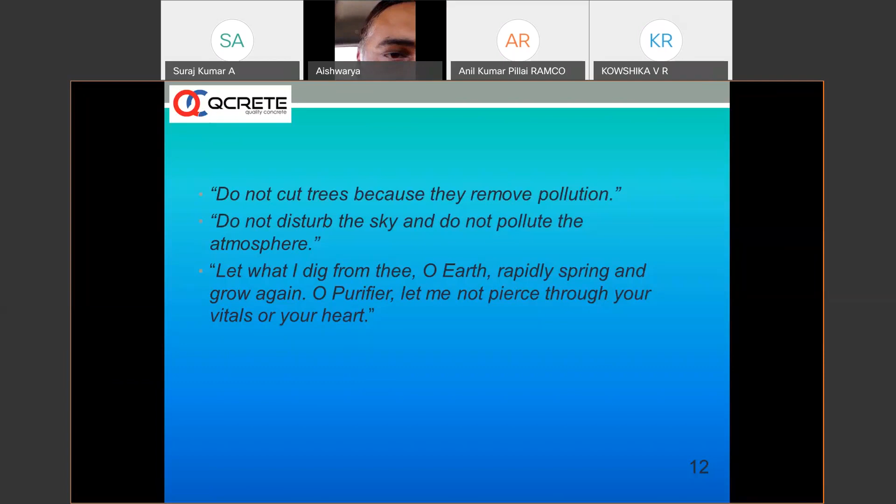Sustainable development is two things we need to understand. One is meeting essential needs of the world's inhabitants, recognizing the limitations of technology and society's ability to meet present and future needs.

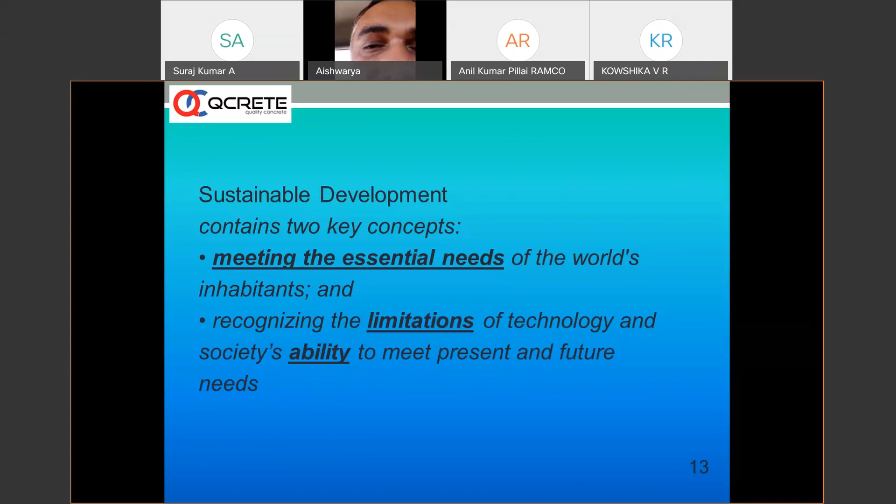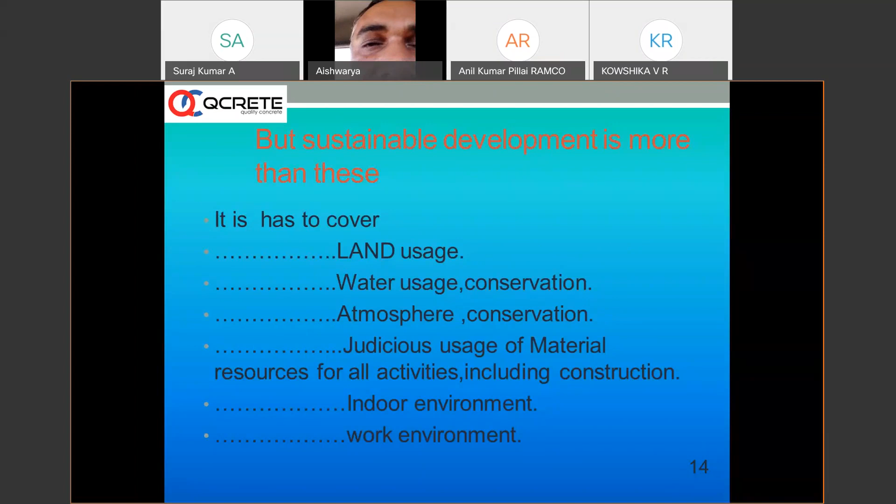Sustainable development is more than land usage, water usage, atmospheric conservation, judicious usage of material. That is where we are going to talk about SCMs. Indoor environment, work environment, all these things we need to take care of when talking about sustainability.

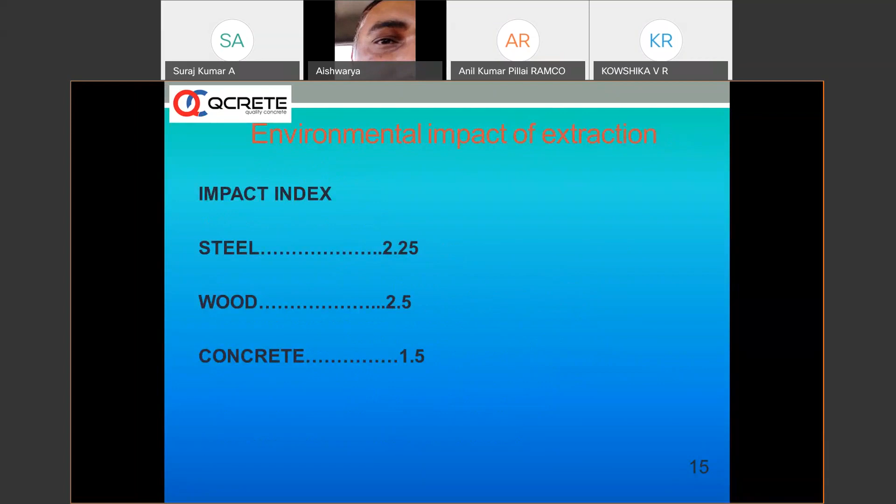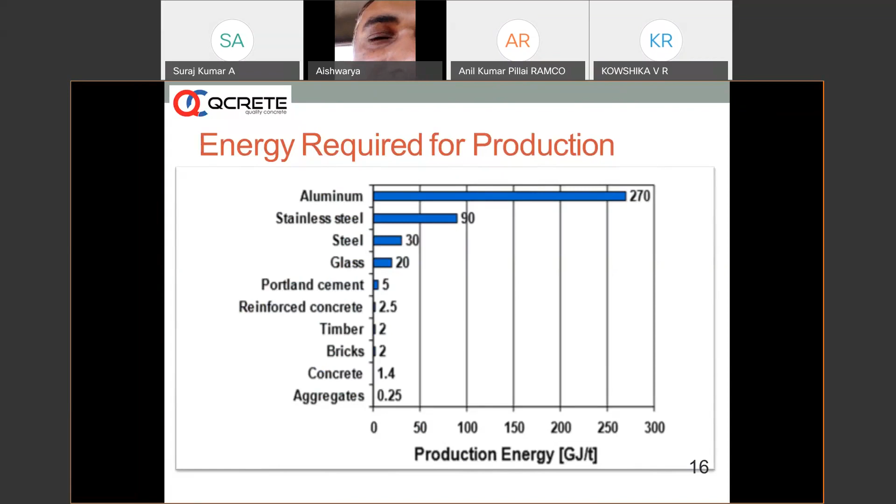Talking about concrete, you can see that concrete is a material which has the least impact on the environment. This graph shows that production of concrete has the least energy consumption when compared to other materials.

Having said all this, we also need to know that human beings involved in construction, cement, and concrete production are giving a big amount of carbon dioxide emissions and greenhouse gas emissions. Even though we are trying to limit these, we are having a great impact on the total environmental impact.

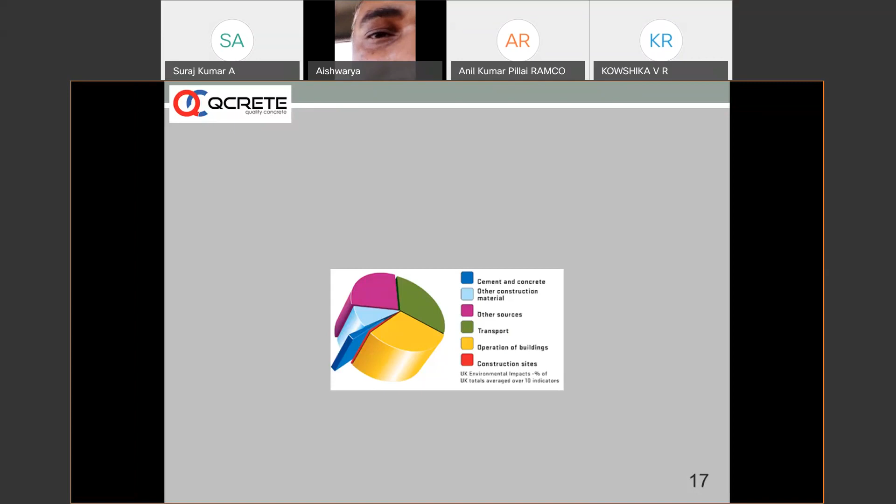So what are the problems we face because of which we are going to talk about SCMs? They are cement manufacturing, material acquisitions, and use of water.

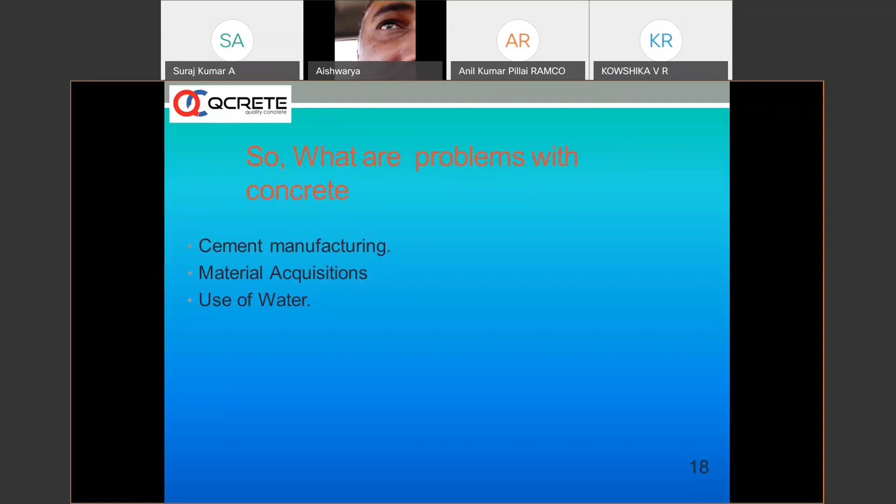Cement manufacturing - all of us know that every ton of OPC produced will give about 800 to 900 kgs of carbon dioxide. We all know carbon dioxide is one of the gases referred to as a greenhouse gas, which is causing global warming.

And 5% of carbon dioxide emissions are coming from cement production, which is alarming. That is why we are talking about today's topic of SCMs, how they are used in the ready-mix industry, and what is the contribution of the ready-mix industry towards the usage of SCM and containment of carbon dioxide emissions.

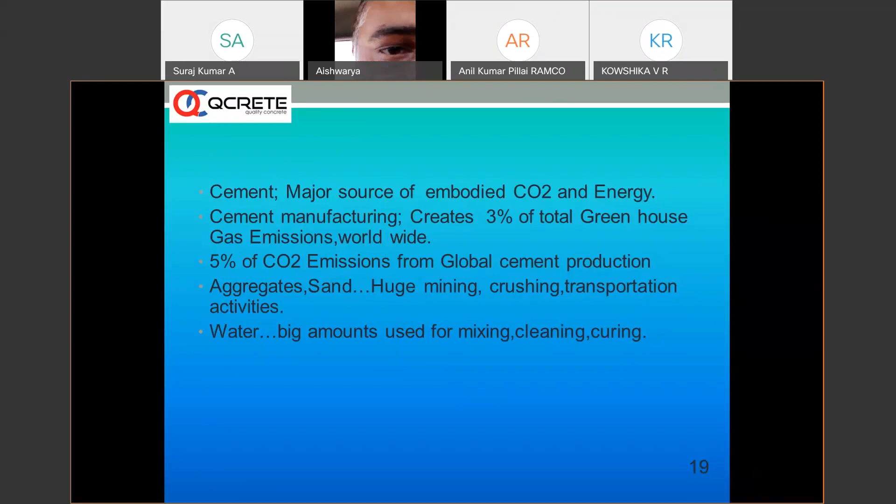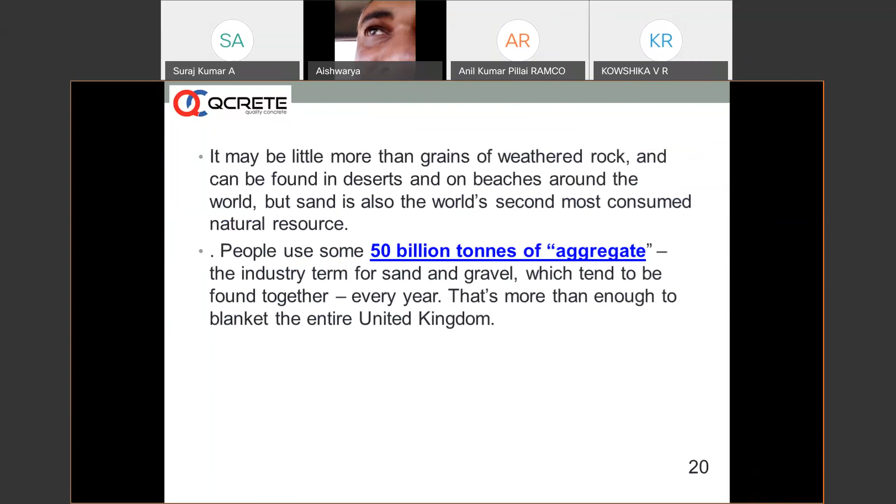The construction industry uses a lot of aggregates, and it's said that about 50 billion tons of aggregates are taken out every year. This is enough to blanket the entire United Kingdom. The construction industry not only uses aggregates and sand for concrete production, but sand is also used for production of glass, which is also a largely used material.

So to become environmentally responsible, concrete production systems need to prioritize minimizing emissions and waste, improving energy efficiency, and ensuring excellent product quality.

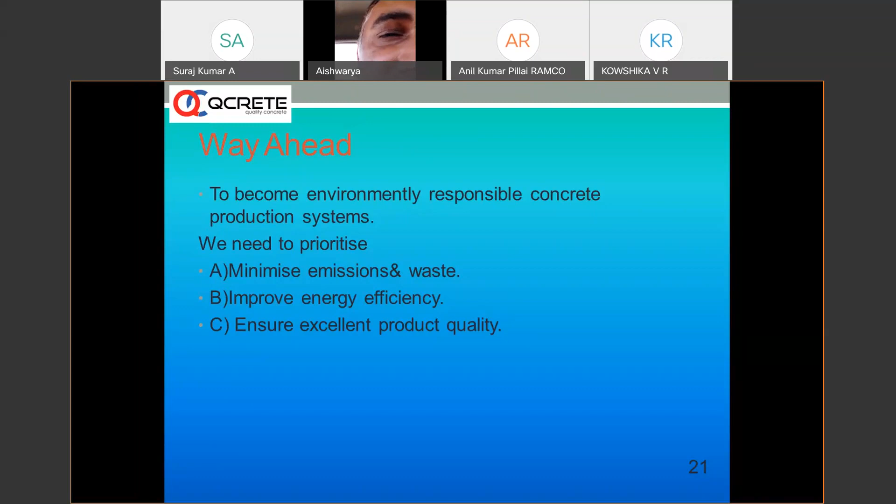So how do we do it? We need to reduce concrete usage by reduction of thickness of members. For that, we have to use HSC, HPC, use lesser binder material, especially OPC, and use supplementary cementitious materials.

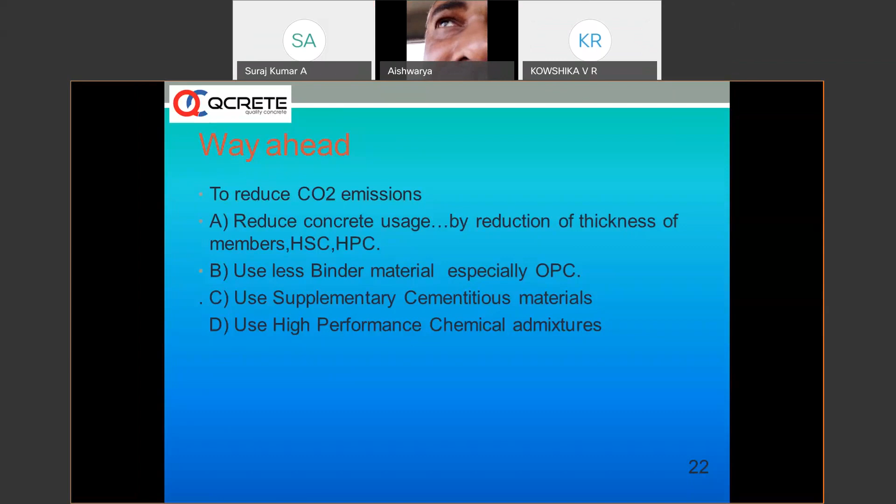That is today's topic - why we have to use SCMs, and what is the contribution of the ready-mix industry, how it is used in the ready-mix industry. That's what we are going to talk about, and also use high performance chemical admixtures. That is how we are going to make a lesser impact and make this planet better.

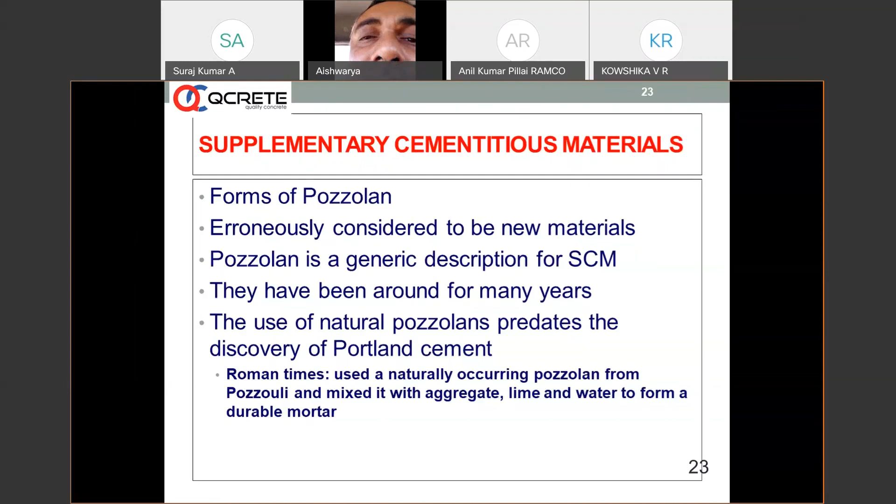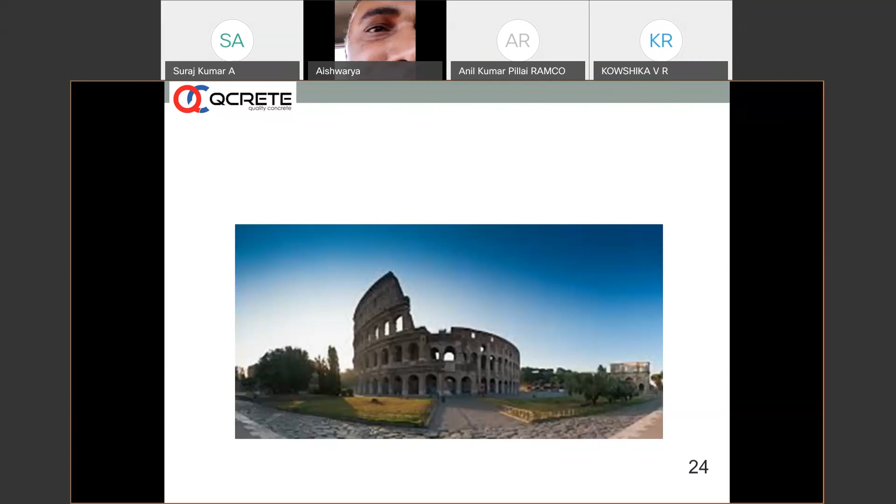Pozzolans are basically rich in silica and alumina. If you look at the composition, they are Al2O3 plus SiO2 plus Fe2O3 plus CaO in various percentages. If you look at different pozzolanic materials, these percentages will vary, and of course the same materials you can see also in cement.

The difference is that these materials will work only in the presence of cement and water - they cannot work on their own. The hydration reaction produces lime, and hence Portland cement works well with pozzolans. The degree of reactivity of various pozzolans with lime is called pozzolanicity.

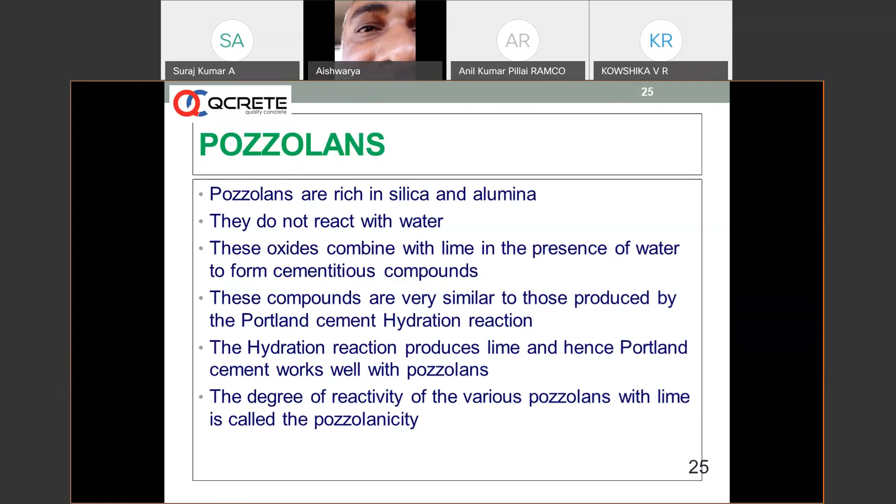We have the most famous modern pozzolanic materials: fly ash and GGBS, as everybody knows, as civil engineers and people associated with the concrete industry. We all know that fly ash comes from thermal power plants. It is absolute waste for them.

Long back in 1999, when I visited the Ennore thermal power plant, I was shocked to see tons and tons of fly ash being pushed literally through pipes into the sea. I don't know what is happening presently, but at that point of time, you could see this fly ash floating around near the thermal power plants, where there are mountains of this material.

At the thermal power plant, it is stored in big stockpiles. Basically it is a waste material for the thermal power plant, and it does not serve any purpose for the plant itself. So usage of this waste material in the concrete industry has a lot of benefits, which we are going to talk about.

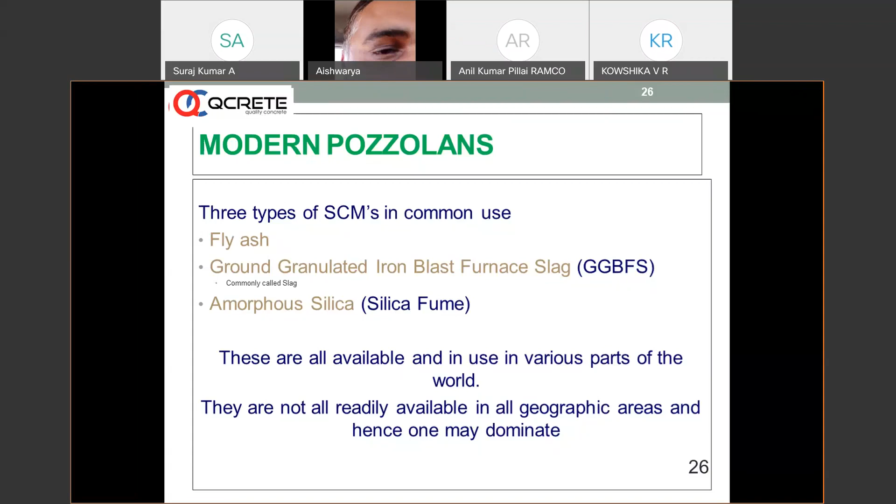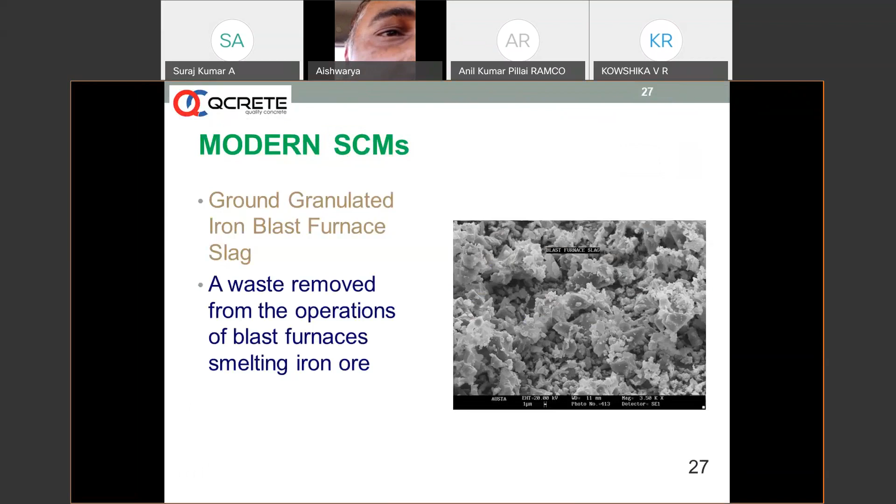Now, coming back to the waste that we have around, you can see one of the microscopic structures of GGBFS in this slide, as observed under an electron microscope. You can see flaky particles.

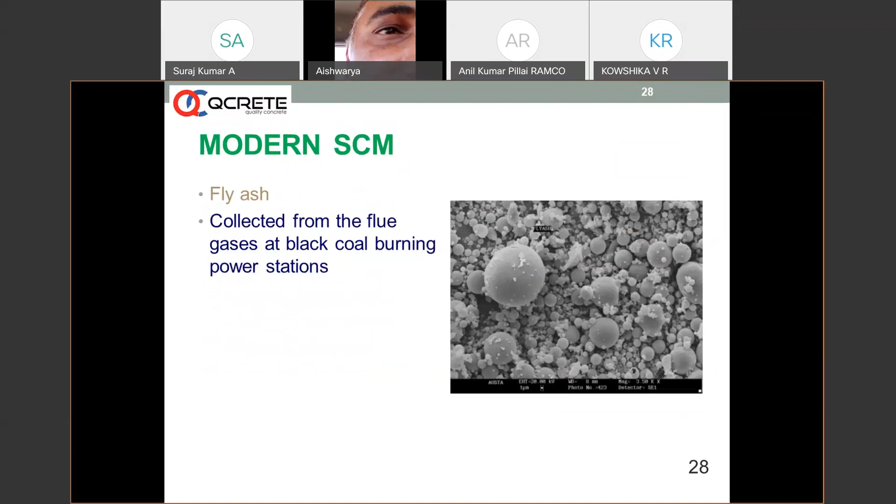This man, Bryant Mather, in 1982 said that we should be moving from a position of why we should use fly ash to a position of why we should not use fly ash. We should be giving reasons why we should not use it, rather than reasons why we should use it. There is so much literature available, so many trials and experiments done, so much R&D work done throughout the world, that Bryant Mather said OPC will be seen only in the museum after some time, and only blended cements and blended materials will be seen throughout the world. That is what he said in 1982.

We have moved a long distance from that point of time, positively, in a very big way throughout the world. Even in India, we have made tremendous progress, and the contribution of ready-mix companies is significant in this matter.

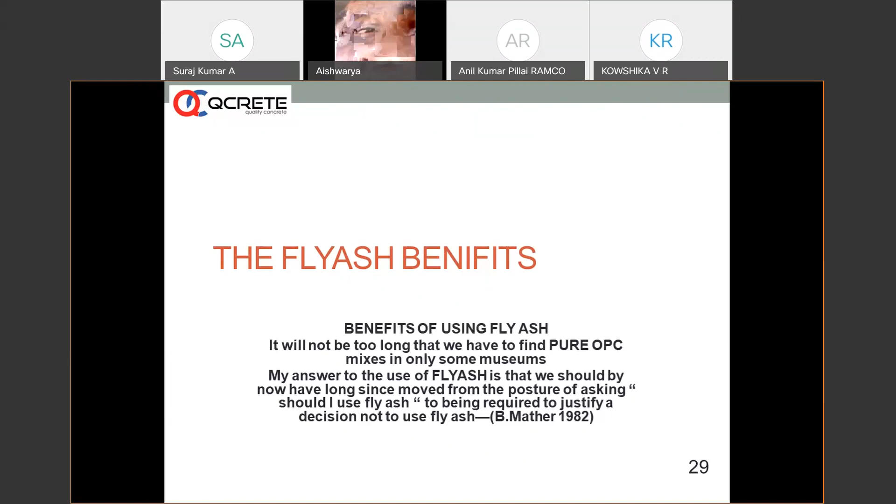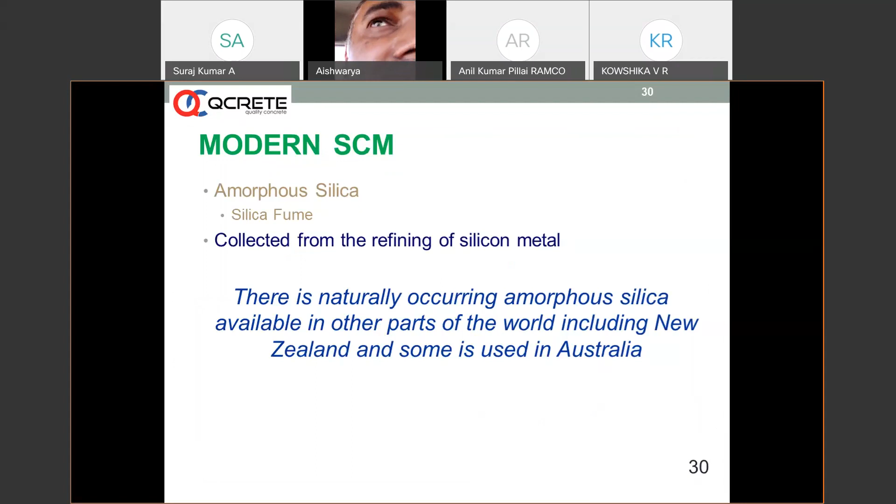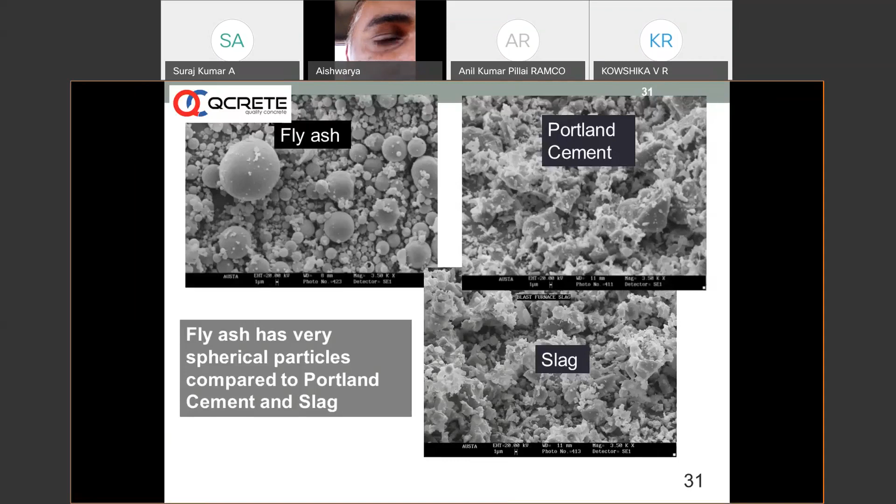The reasons why ready-mix companies and the concrete industry have to use SCMs are basically categorized into three categories: environmental, commercial, and technical. As far as I am concerned, the most important aspect of why we should use SCMs is the concerns related to environment.

That is why we have to use SCMs more, and the other aspects follow. Technical aspect takes the second seat—actually technical aspects are very, very important, how the SCMs benefit the concrete and durability of concrete. And of course, the commercial reasons, according to me, take the last place.

In fact, commercial reasons should not be considered, because the durability imparted by these materials is significant and incomparable to what happens when we use only OPC.

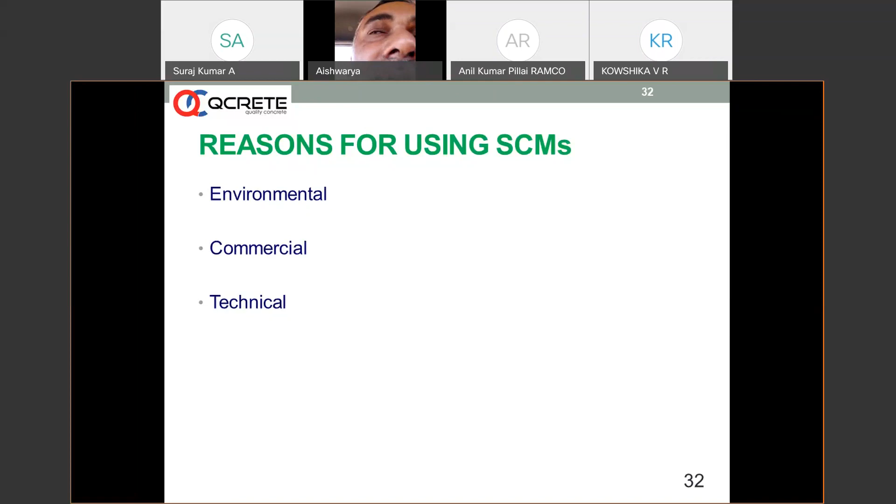Environmental reasons: fly ash is dumped into natural or man-made lakes or dams, and slag accumulates in large stockpiles. In the cement manufacturing industry, there is pressure commercially and environmentally to reduce energy use and emissions. The use of SCMs to replace a percentage of Portland cement reduces power demand and the generation of gases such as carbon dioxide.

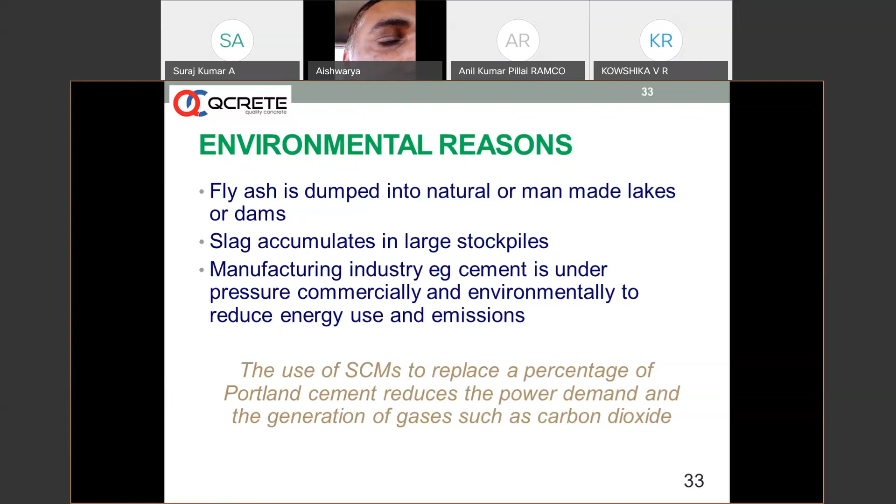Commercial reasons: lower material costs for concrete, as fly ash and slag are generally lower in cost than Portland cement. As I said earlier, commercial reasons should not be considered at this point of time, because there are many other reasons why we should use these materials.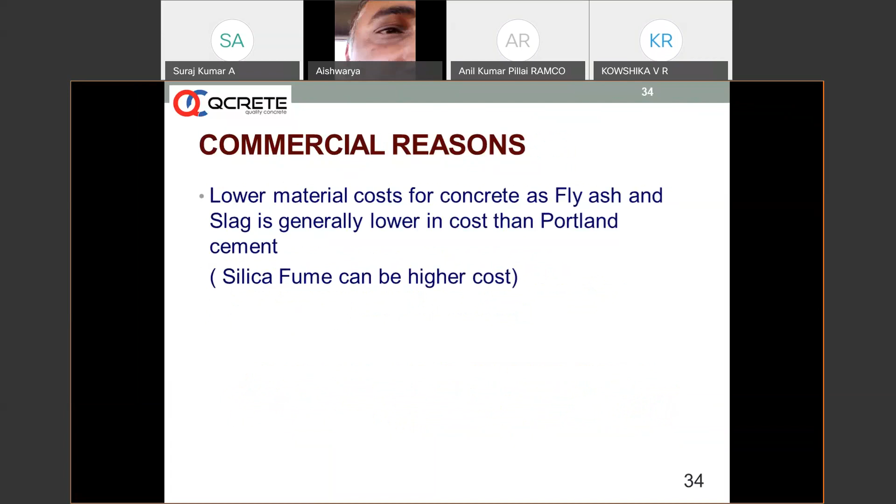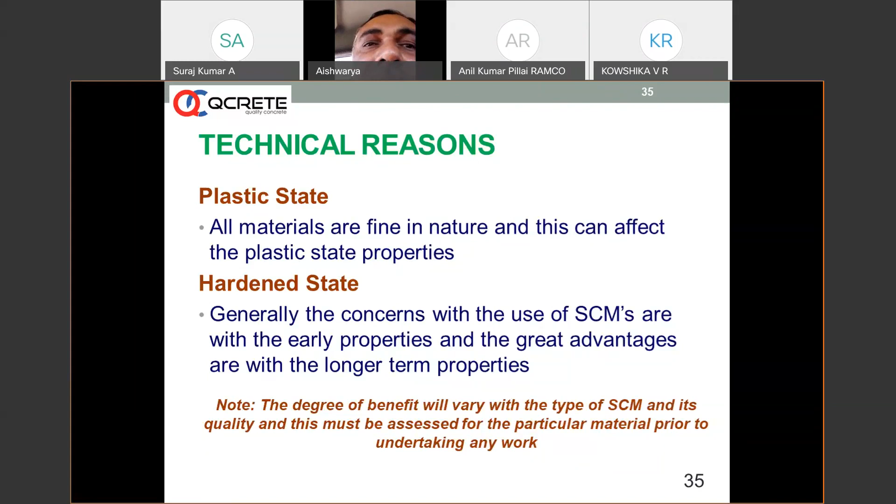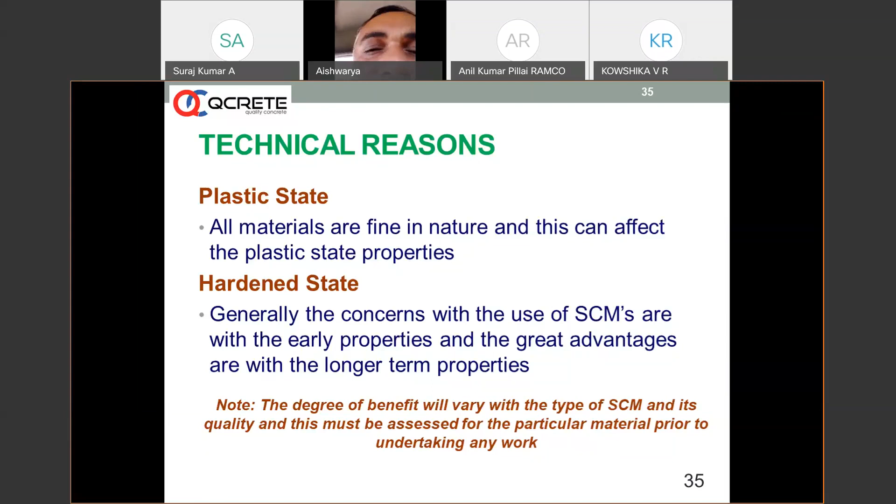Technical reasons are that all materials are fine in nature, and this can affect the plastic state properties. In the hardened state, the concerns with usage of SCMs are with early properties, while the great advantages are with longer term properties. The early age properties were earlier misunderstood - there was a misconception about the strength being lesser in the early state and early life of concrete, up to 7 days. But as concrete ages, other properties significantly transform it to the next level of durability, and hence that becomes a very important reason.

Portland cement controls the setting time of concrete, and SCMs reduce the quantity of Portland cement in concrete. Lower Portland cement content gives extended setting times. This helps a ready mix company to transport concrete - if a control concrete without SCM has a setting time of about 4.5 to 5 hours, the setting time with fly ash or GGBS is extended by about 1.5 to 2 hours, giving flexibility for transport over longer distances.

Bleed rate is also reduced, which is one of the significant contributions. If you look at an OPC plus fly ash mix, bleed rates are lesser. The mixes are cohesive, which is a very important advantageous property when using OPC plus fly ash.

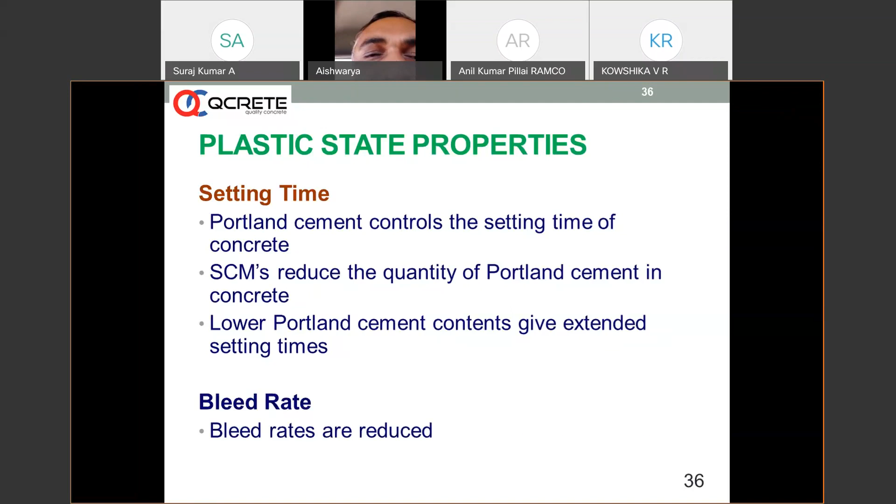Workability: SCMs are very fine materials. Fly ash has a major beneficial impact on workability. We saw earlier a slide showing the microscopic structure of fly ash - due to the sphericity of the particles, they move one over another, giving way for higher workability.

On the other hand, you can reduce water to some extent. Let's say we move from an OPC mix to an OPC PFA mix - taking a 300 kg OPC mix and comparing with 25% replacement of fly ash, that's about 225 kg OPC and 75 kg fly ash. When replacing about 25% from the control mix, there is a possibility of a minimum 6 to 8%, sometimes even 9-10% water reduction, achieved due to the sphericity, particle shape and size. So water-cement ratio is pushed down when using a fly ash mix.

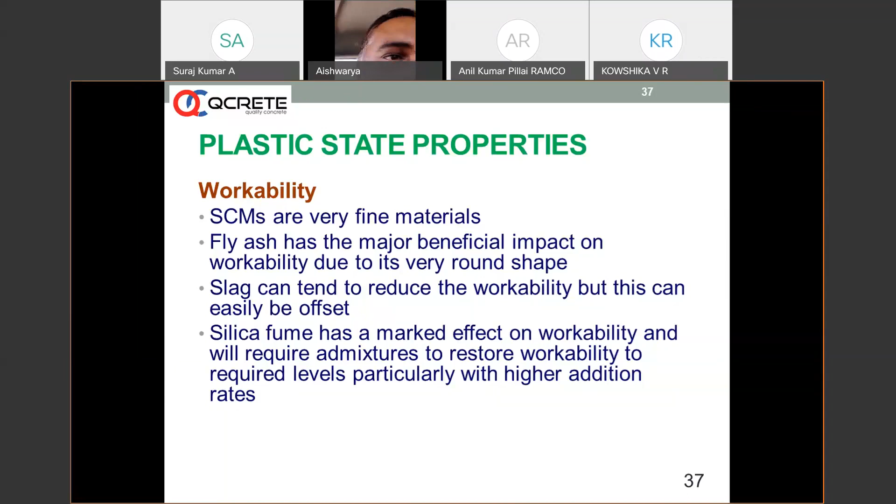Silica fume has a marked effect on workability and will require more admixtures. Sometimes silica fume is referred to as a slump killer - you have to use more admixture when using silica fume, otherwise you'll end up with slightly bigger water-cement ratios.

The improvement in pumpability and finishability is significant when using an OPC fly ash mix. OPC PFA mix makes the concrete smooth, cohesive, and reduces the pressure on the pipeline during pumping, and wear and tear of pipeline and other equipment are reduced to a significant extent. Anybody who has used OPC PFA mix likes it simply because of these kinds of attributes.

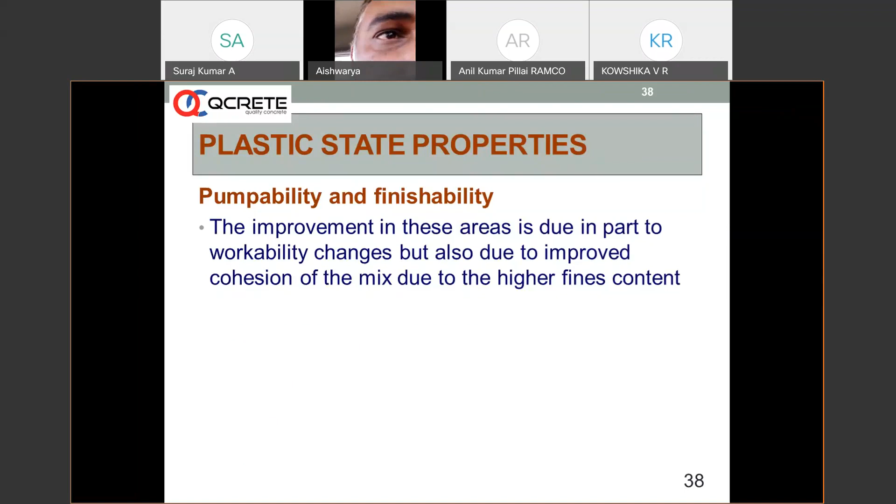One of the mixes we did long back in 2002, where the customer asked us to pump M10 concrete. He had to finish the PCC quicker in a day, 150 cubic meters. We used fly ash here as a pumping aid. Fly ash can be used as a pumping aid for long horizontal pumping as well as higher vertical pumping. So 130 kg of OPC was mixed with about 155 kg of fly ash, and we got about 10.5 to 12 MPa in 7 days. The requirement was only 10 MPa, so we had better strength, but the point was not strength - pumpability was significantly increased using fly ash.

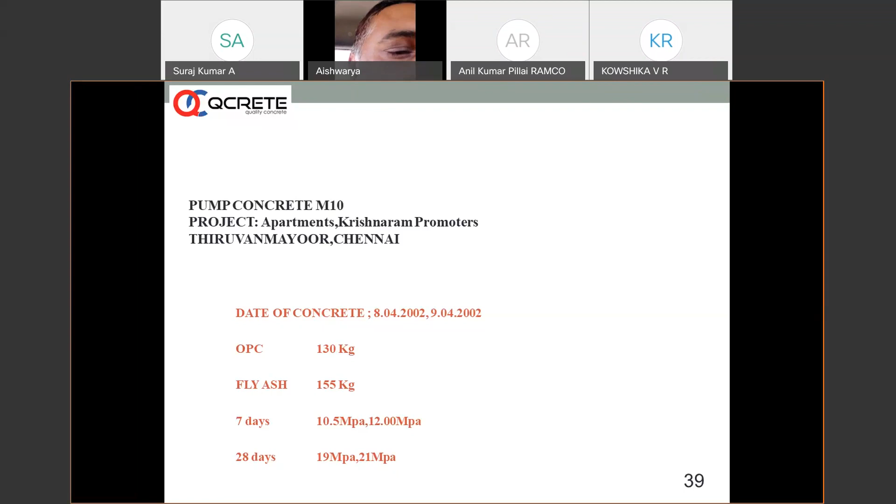The same pumpability characteristics were used in Burj Dubai, where most of the high-rise pumping in Dubai used OPC plus PFA plus microsilica for M100 concrete.

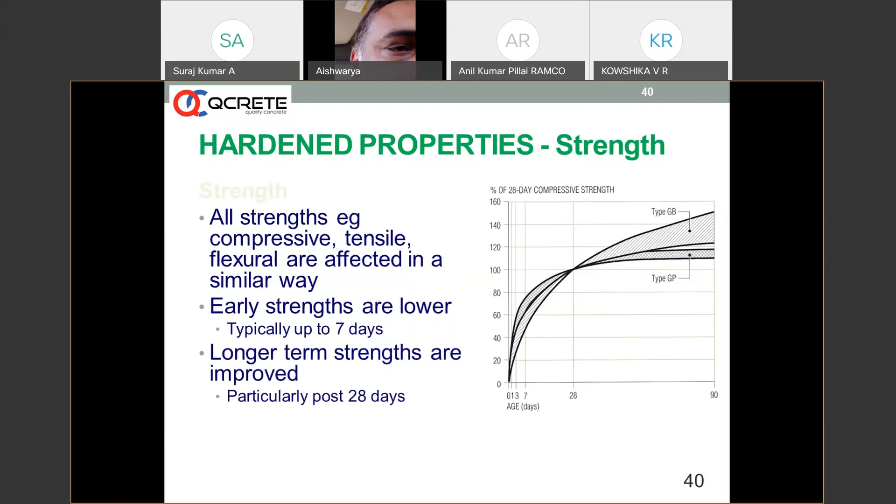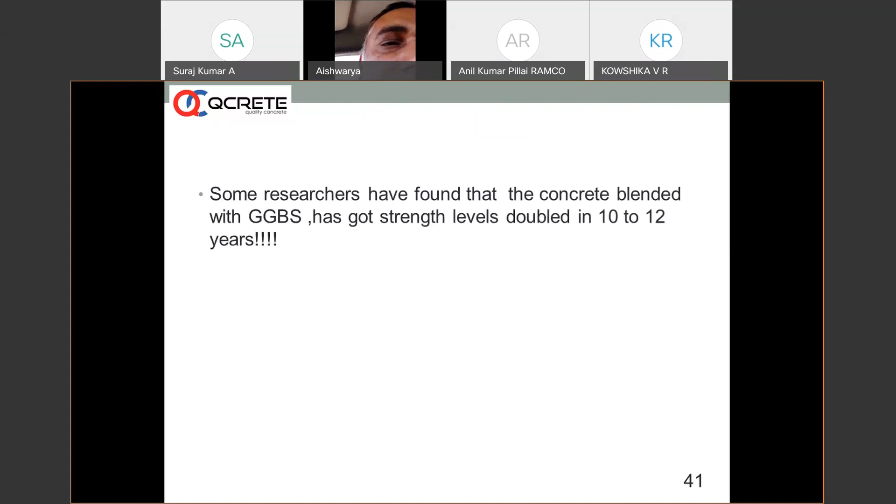Some researchers have found that with GGBS mixes, in 10 to 12 years the concrete almost doubles in strength.

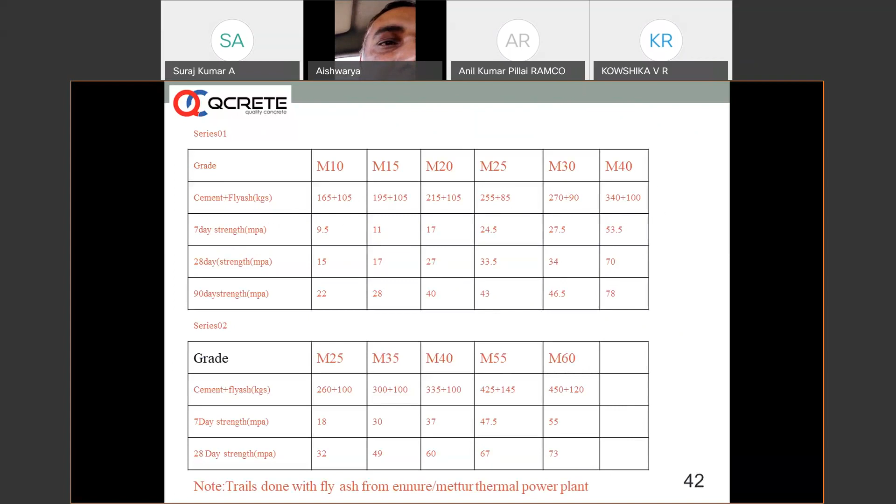The customer had purchased M25 and M20 concrete at that time, but actually got almost M40 or M45 grade concrete. So the customer gains this benefit over a period of time.

There is a reaction with pozzolanic material, always referred to as a secondary reaction. Cement plus water gives calcium silicate gel and calcium hydroxide. This calcium hydroxide is consumed by the constituents of mineral admixtures - SiO2, Al2O3, Fe2O3, CaO - and further calcium silicate hydrate gel is formed. The amount of calcium hydroxide in the concrete is reduced, and that is how durability shifts to the next level, making the concrete more durable with significantly improved long-term strength.

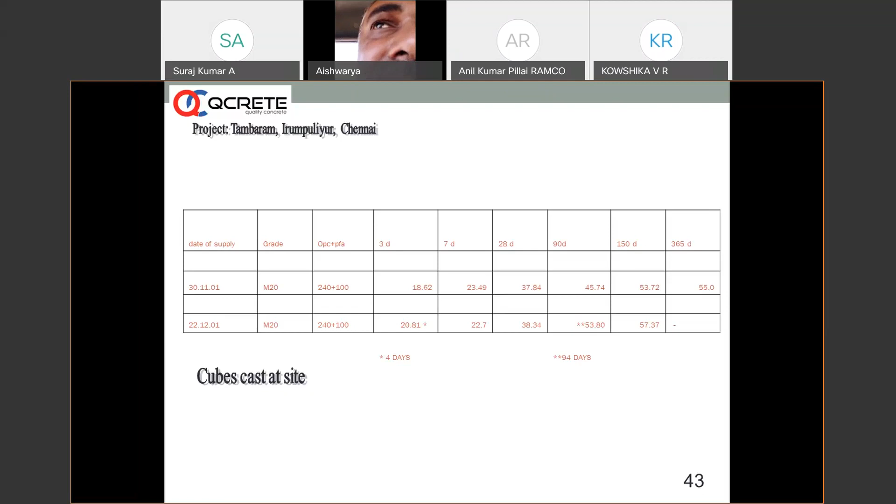This reinforces the thought that a customer who achieves, say, 30 MPa concrete in 28 days is bound to get almost 40, 42, or 43 MPa in 90 days. There is significant growth afterwards. Of course, the growth of strength over time depends on the fineness of cement and the properties of the fly ash in question.

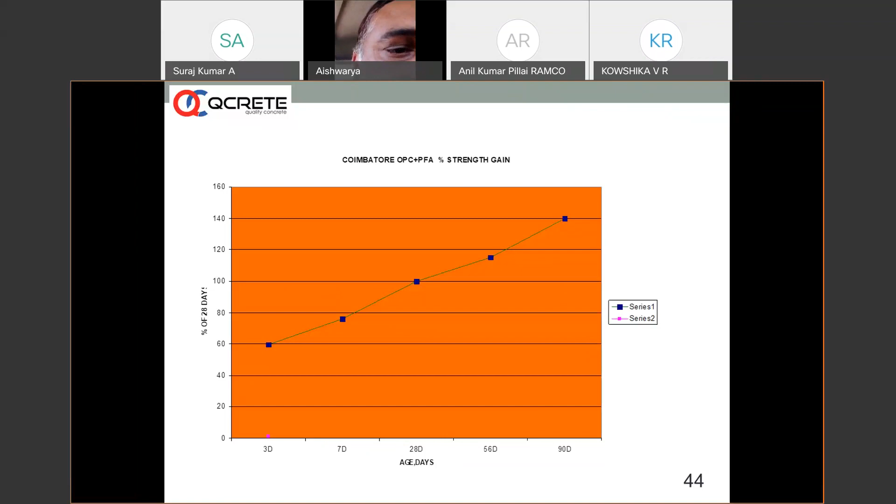Earlier, there were a lot of misconceptions. One of the misconceptions was that fly ash, when used in a ready-mix concrete industry or in a company, the point is that they were talking about lower strengths in the initial stages, and they were also talking about that high-grade concretes cannot be done.

So these trials, and there was a commercial production of this kind of mix actually in Hyderabad. We supplied about 120 cubic meters of this kind of concrete. So OPC plus PFA, in the year we supplied, about 2009. OPC plus PFA can be used to make M60 concrete and higher. And of course, without the usage of any other additional materials like microsilica, we could achieve 77 MPa in 28 days. So you can easily achieve 60 MPa and all.

We can use this kind of materials, SCMs, and make it. Only problem with this kind of commercial production is we should be careful about the consistency in the supplies. If there is a problem with the properties of fly ash, then it becomes a question mark, especially when we are using for high grades. Other than that, we can easily use and make concrete with most of the Indian fly ashes up to M25, M30, M40 easily. But when we are going for higher grades, we need to be careful, and we probably have to take the aid of other supplementary cementitious materials like microsilica, metakaolin, etc.

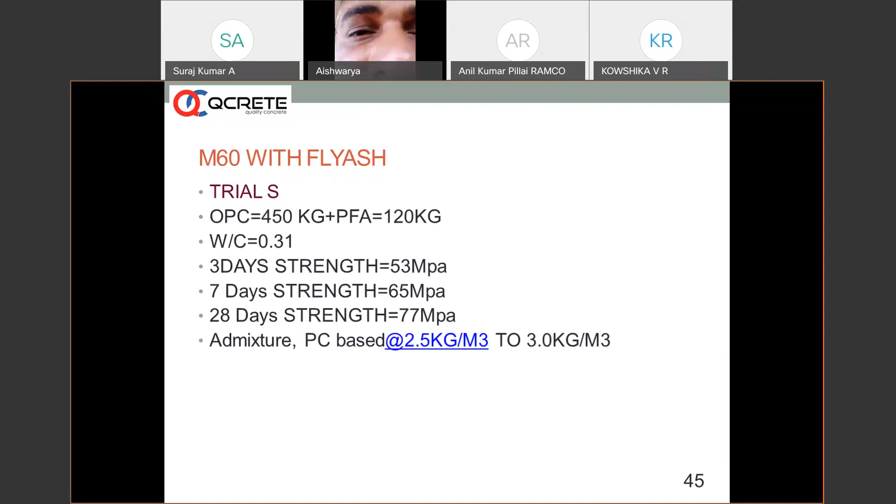One of the other significant contributions that happen when we are using SCM in modern day constructions, especially when we are constructing big rafts, which are about maybe thousands of cubic meters of concrete being poured, and thickness of a raft maybe more than 1 meter, something like that. Here, the temperature rise over time becomes a significant factor. We have to measure the temperature at the core of the concrete and the surface of the concrete, and if the temperature differential is more than 15 degrees, then thermal cracks will occur.

So to avoid that, the only possibilities the concrete technologists through the world and scientists have found is usage of supplementary cementitious materials and usage of certain other methods like insulating the concrete, and then also use cold water, ice, etc. to keep the concrete cooler.

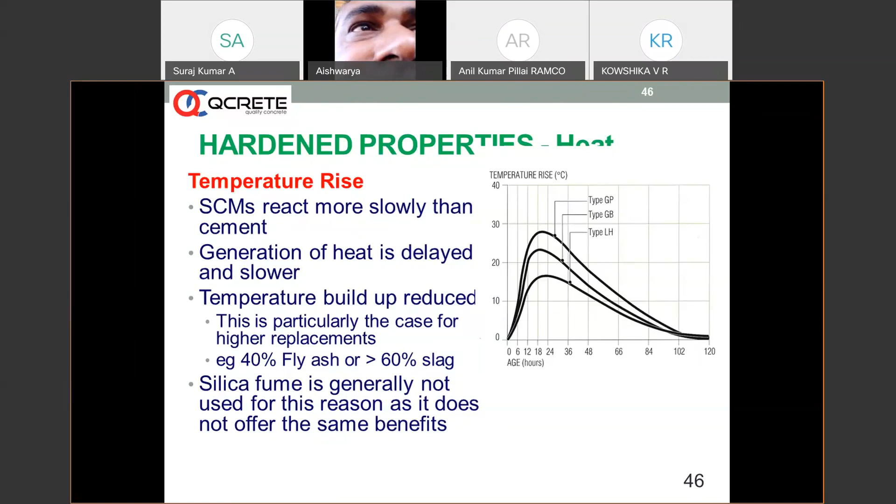GGBS lowers peak and overall heat, reduces thermal stress, reduces micro cracking. One of the biggest contributions. Optimum substitution level is 60 to 70% in this kind of situation. If you want heat reduction in heat development, heat buildup in raft foundations, you need to go for above 50%, at optimum levels, say for example 60 to 70%.

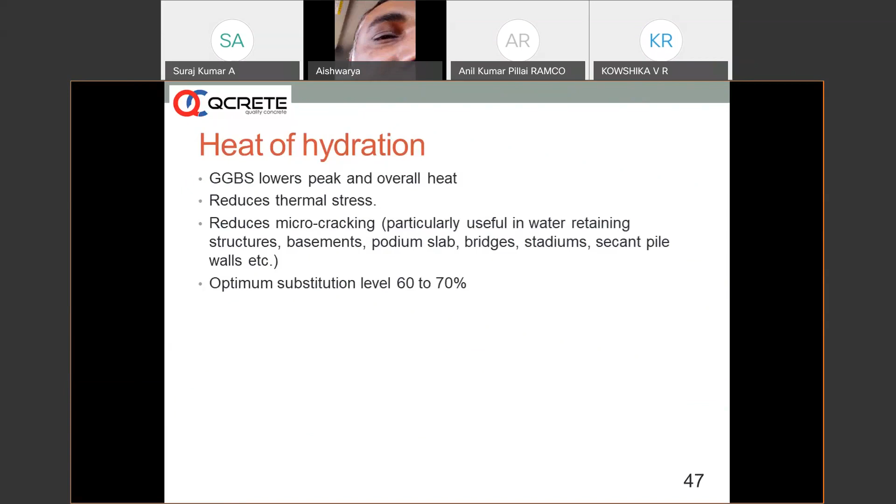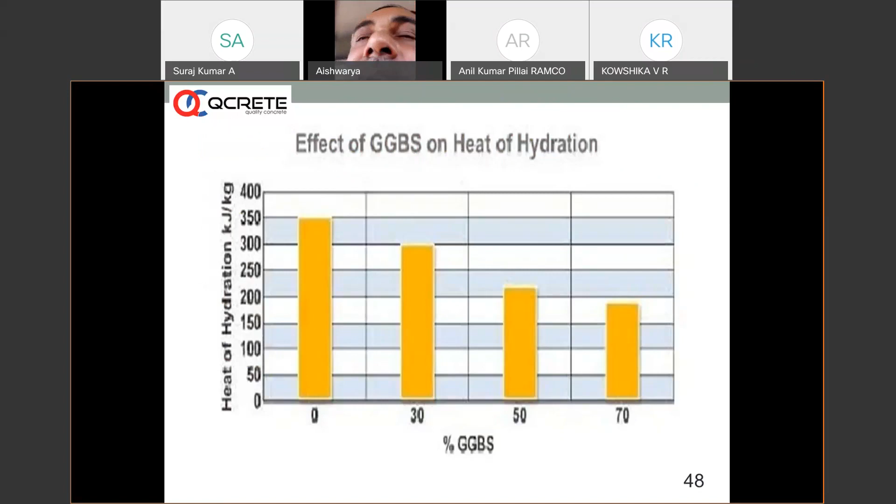Again, another slide which shows that you have least heat of hydration when you have blended 50 to 70%. When you blend, there is a significant reduction of heat.

Another most important contribution of hardened properties is sulfate resistance. Sulfate resistance of these SCMs, especially if you have a look at fly ash and GGBS, you can see through this graph.

When OPC mix is blended between 20 to 40% of fly ash, the mortar expansion, or the resistance to sulfates, is significantly reduced against a general purpose cement or OPC cement. The OPC cement has significant expansion, that is least resistance to sulfates, and highest resistance when you are using OPC plus fly ash or OPC plus GGBS.

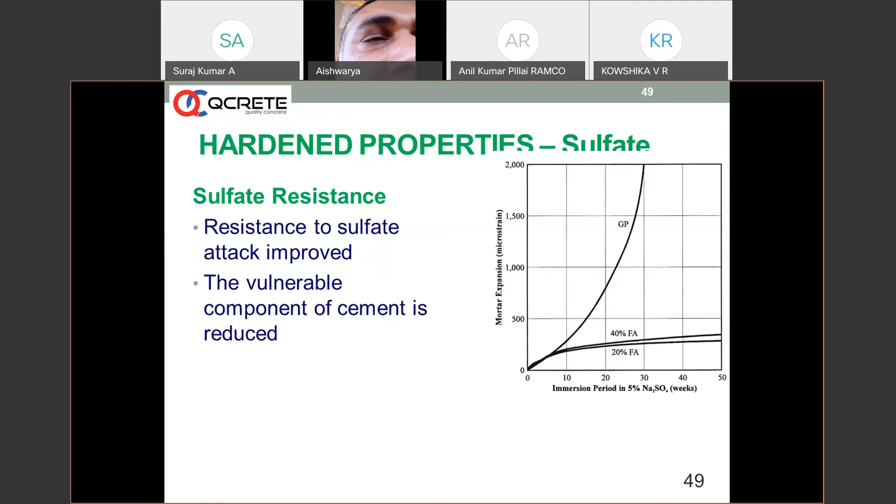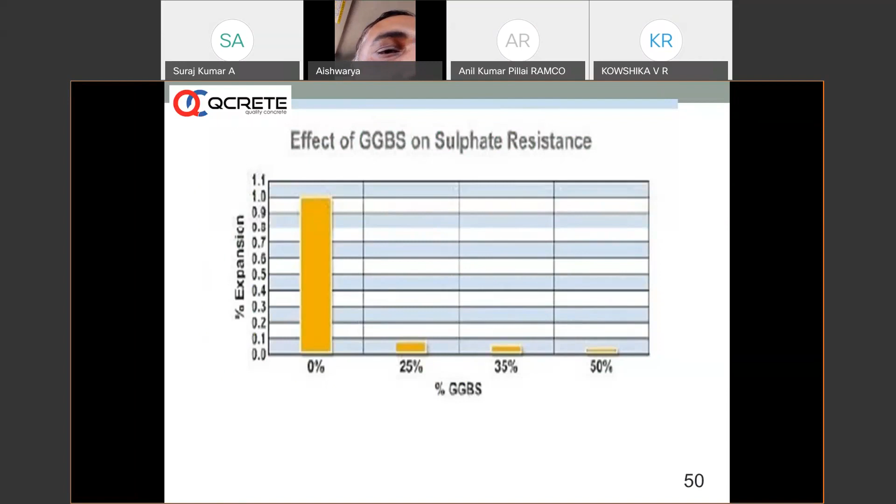The same is depicted when you are using GGBS also. You can see in this slide, when you have 0 GGBS, that is control concrete, reference concrete made with OPC, you have a high amount of expansion, that is least resistance to sulfates, and you have excellent resistance to sulfates when you have about 35 to 50%.

Chloride ion resistance is one of the defining parameters, especially when we are doing concrete in marine or coastal structures. Chloride ion resistance becomes a very defining factor as far as durability is concerned. So if you want to make concrete highly durable in coastal areas or for marine structures, especially when in direct touch with seawater, you have to have a water cement ratio of 0.4 and below, and a blending of minimum about 60 to 70%.

Globally, for marine structures or chloride ion resistance, they specify 70% GGBS to be used, and all across the globe, including in India, water retaining structures, especially closer to the sea, and structures in touch with seawater, are done with 70% GGBS and 30% OPC.

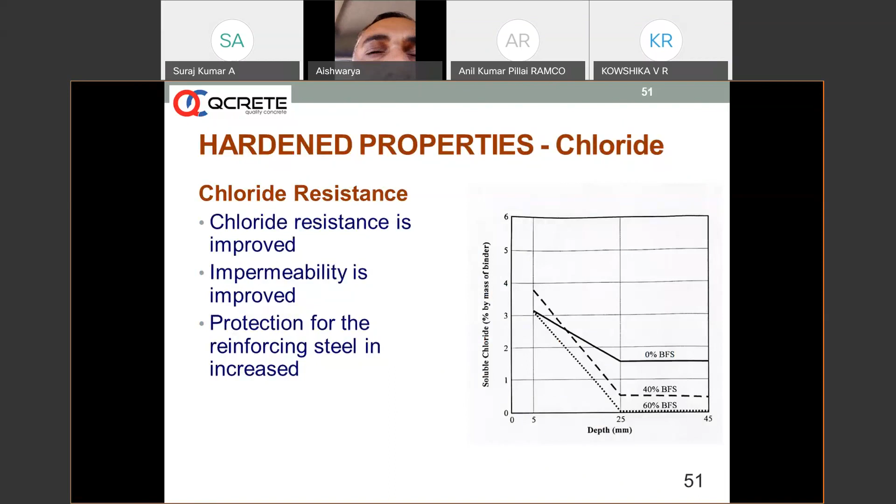And I can say in this connection, there is no match as far as OPC is concerned. OPC is no match when we are talking about chloride ion resistance. The blended concretes with OPC-PFA or OPC-GGBS are head and shoulders above OPC when we are talking about resistance to chlorides.

Another slide showing a very important improvement in resistance to chlorides. When we are using 60% GGBS, initiation of corrosion will start only after 50 years, and the time to first repair is estimated at about 70 years. That means up to 60-70 years when using OPC plus GGBS mixes, you don't have to bother about repairs, if the concrete is placed and compacted properly.

On the other hand, when you are using OPC alone, you have initiation of corrosion about 10 to 12, 15 years, and then you have to have a repair at a very early age, say 30-35 years.

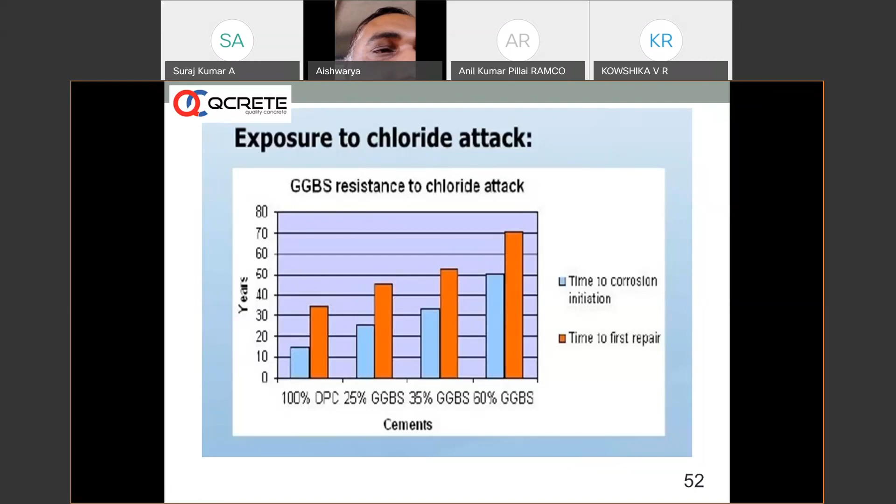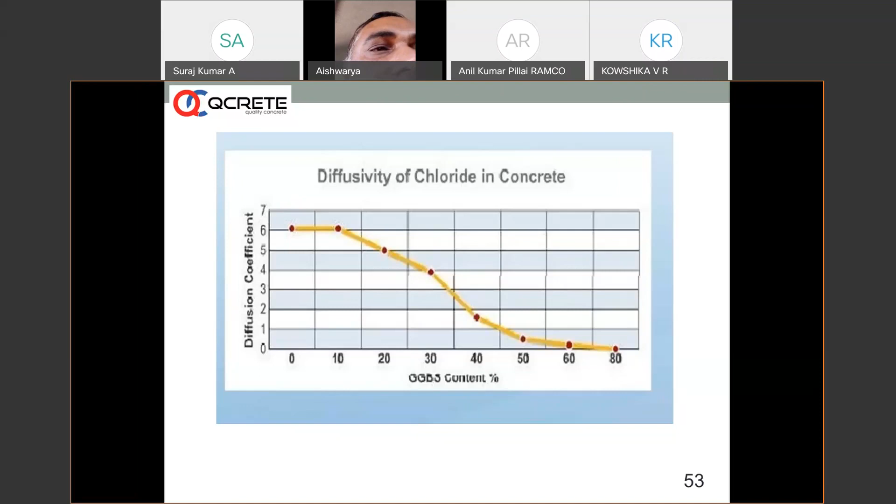Diffusivity of chloride in concrete. Here you can see a complete absence of diffusion, meaning chlorides are almost nil when you are talking about addition of about 60 to 80% of GGBS, whereas in an OPC mix, with no GGBS, you have significant diffusion.

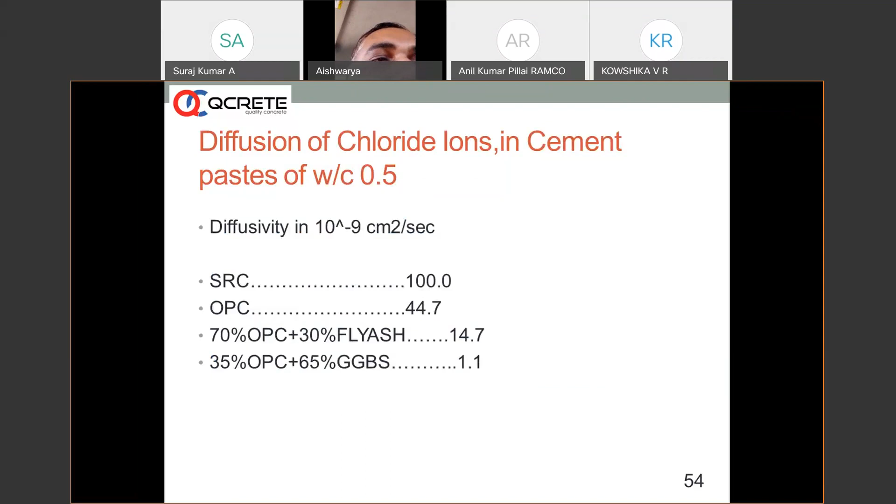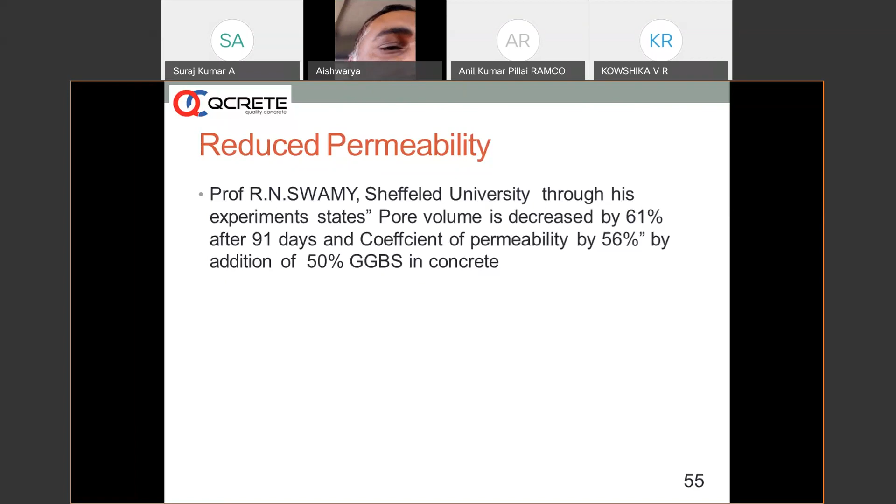Again, service life with respect to chloride attack on structures - you have the least attack when talking about PPC and PSC, and OPC again seems to be no match with regard to these properties. These factors make what ready-mix companies are using far better, because most ready-mix concretes nowadays are done with blended concretes.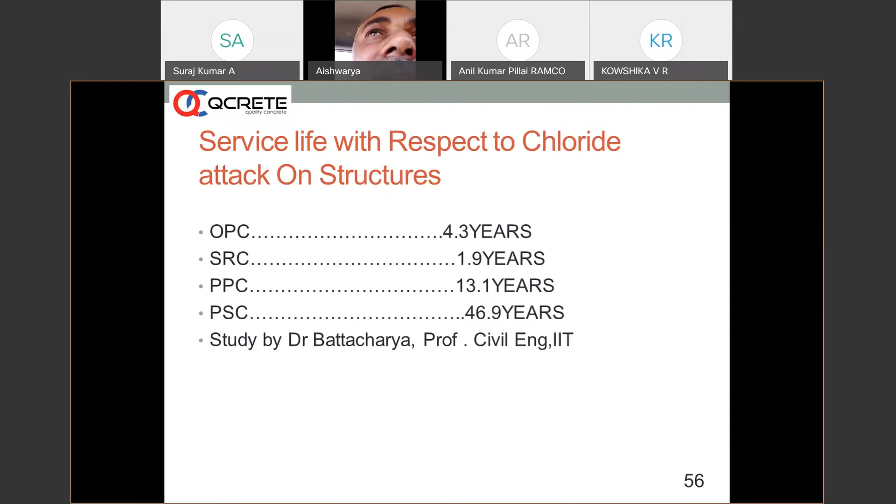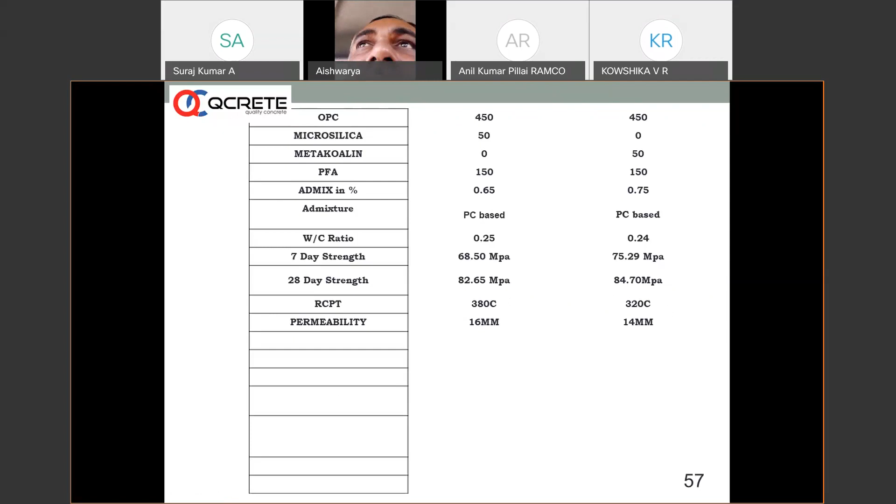Again, using metakaolin and microsilica, the RCPT value, which is measured as per ASTM C1202 - the columns represented here, 380C columns and 320 columns, show that the concretes are excellent and extraordinary, because when the resistance falls below 500, that kind of concrete is said to be one of the best concretes as far as chloride ion resistance is concerned.

Another example where OPC, PFA and metakaolin has given high strengths. As I said earlier, the M100 concrete in Burj Khalifa is done with a combination of OPC, PFA and microsilica.

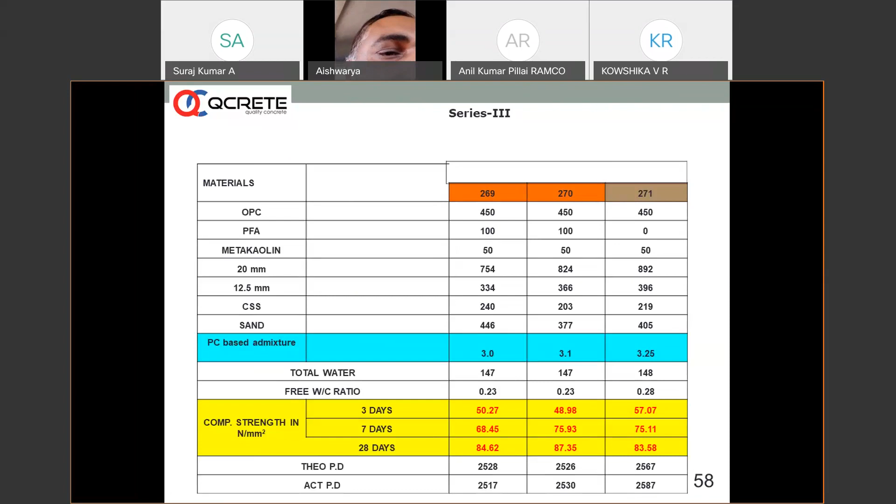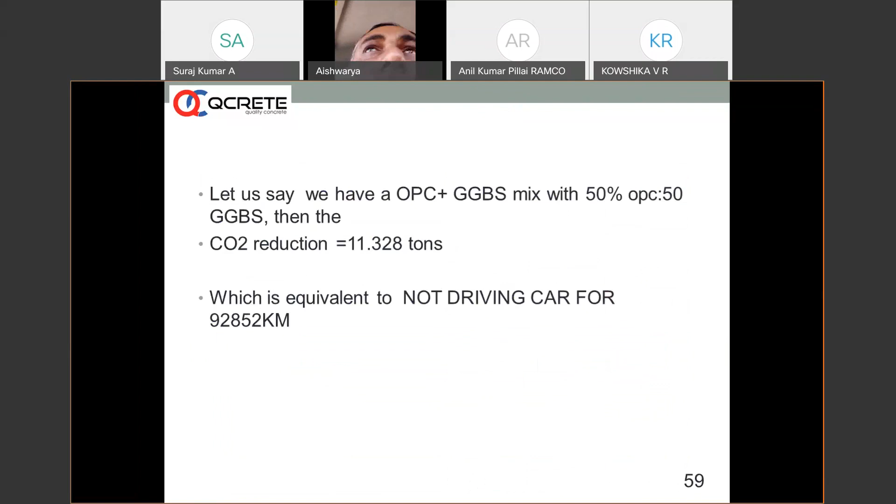So if you are doing about 100 meter cube of OPC-GGBS with 50% OPC and 50% GGBS, carbon dioxide reduction is about 11.328 tons, which is equal to not driving a car for approximately 92,000 kilometers. So this is, as I said earlier, the environmental impact and benefit that we can pass on by using SCMs or pozzolanic materials or mineral admixtures, and this overrides all other benefits.

As we were discussing earlier, the benefits are completely much above what ordinary Portland cement concrete can give. And hence, ready-mix companies using these blended concretes are making a significant contribution towards greener concretes and making the environment better. One of the factors improved by SCMs and pozzolanic materials is the albedo number.

Albedo number is one of the measurements of reflection of light. If the light from a surface is completely reflected, if the surface is completely white, like snow, it is said to have an albedo number of 0.9. Regular concrete has 0.2 to 0.3, and new concrete 0.3 to 0.4.

If you are using GGBS, it improves the albedo number, that is reflection. The concrete becomes whiter. When the concrete becomes whiter, the requirement of lighting, for example when driving cars at night and lighting the road, reduces.

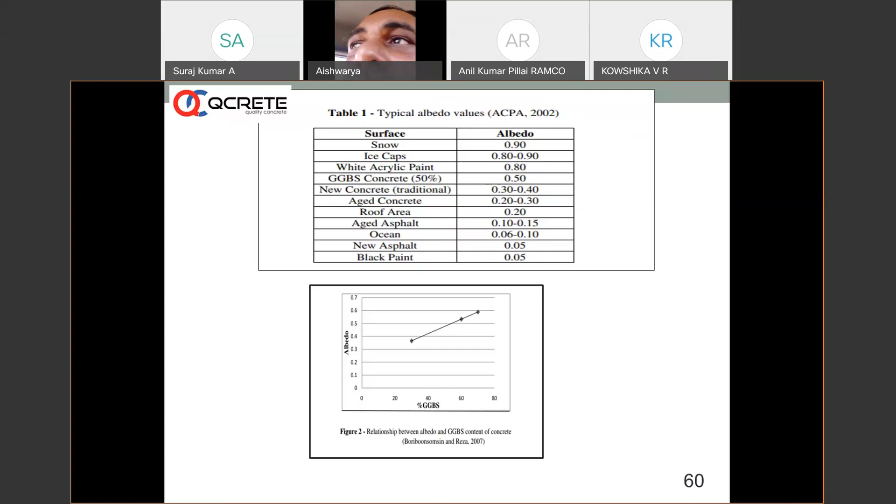So there is a significant contribution if you are using SCMs, especially GGBS, and partially certain fly ashes from certain sources, and metakaolin. All this improves the albedo number in a big way, which is again a contribution.

So benefits of mineral admixtures or pozzolanic materials, in short: good workability, better cohesion, finishability, pumpability. Mixes are not too sticky. Any concrete technologist who has used OPC PFA mixes or OPC GGBS mixes, especially OPC PFA mixes, will vouch for this. Increased strength, better long-term strengths.

Some customers may face a case in winter season, especially in Bangalore, for M25 concrete, since many don't have a curing facility to cure at 27 plus or minus 2 degrees for cubes. The outside temperature in Bangalore, for example, falls to say 12 degrees or 10 degrees at night. So there is a possibility that the 28-day strength can come borderline in winter season in many places if curing temperatures are not maintained.

So we need not be alarmed. Customers can be completely assured that when using OPC plus SCM, there is a significant gain without doubt beyond 28 days, and we don't have to bother. Even the structure strengths come at par with the characteristic strength at 28 days.

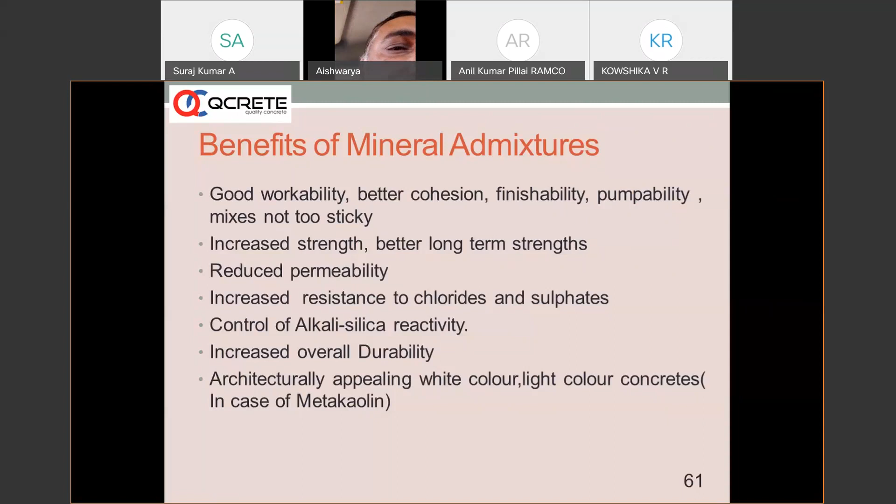Some of these concretes are done with metakaolin. Metakaolin is one of the materials, China clay, which is heated up to 650 to 800 degrees.

It also has a lot of other applications, like reducing efflorescence and improving aesthetic values of plasters. It is one of the materials used in GFRC and shotcreting, resulting in lesser rebound. In other countries, it is used in making concrete countertops, for which metakaolin is one of the materials used.

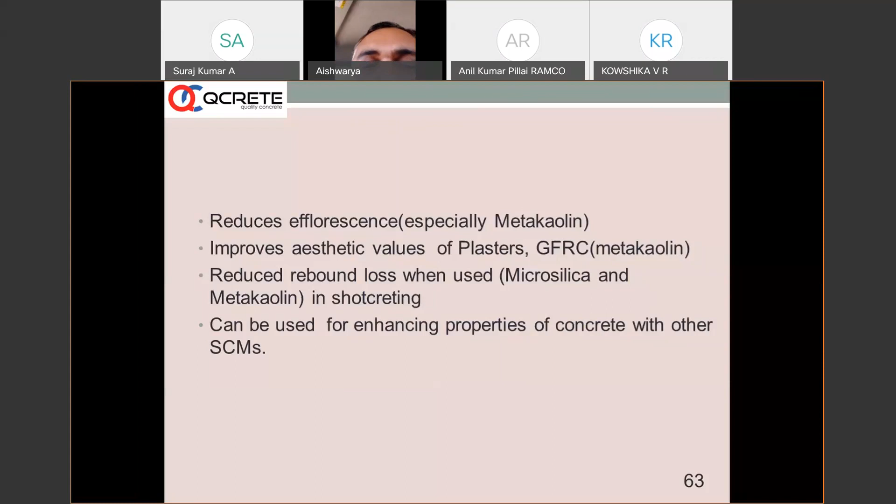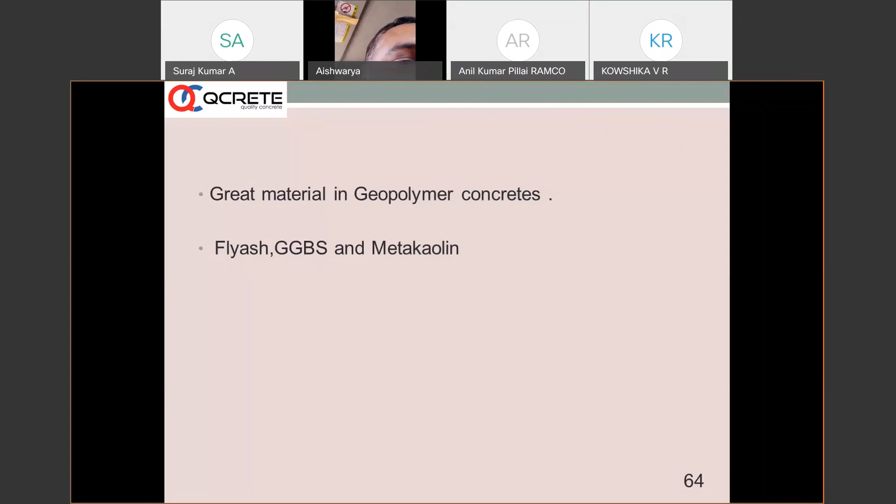Fly ash, metakaolin, GGBS, all these can be used as additives in concrete. Metakaolin, microsilica, and other materials including fly ash and GGBS make concrete stronger, better concrete with lesser cement content.

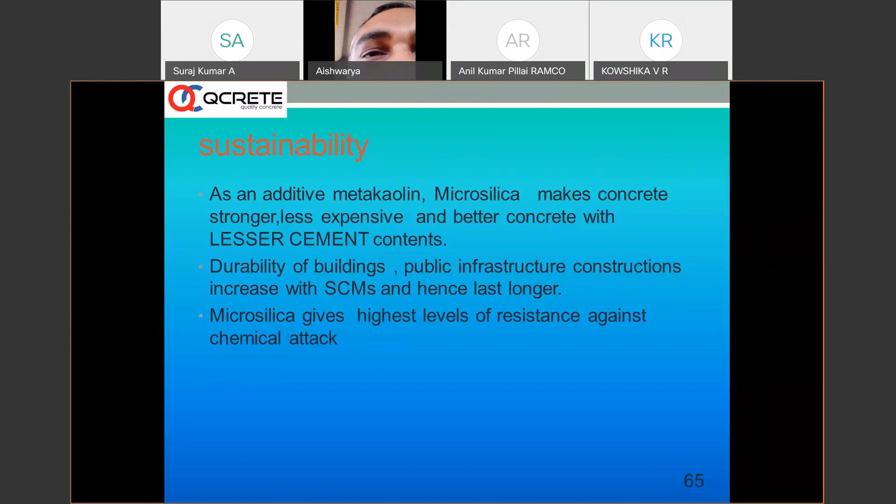Durability of buildings, public infrastructure, and constructions increases with SCM usage. Microsilica gives the highest levels of resistance against chemical attack, and all these SCMs have to be used in conjunction with superplasticizers, hyperplasticizers, and viscosity modifiers.

All this together has changed the way construction is done. We are able to pump concrete to higher places. High slump concretes, free flow concretes, and self-compacting concretes are achieved, resulting in higher production, reduced labor, and reduced construction time.

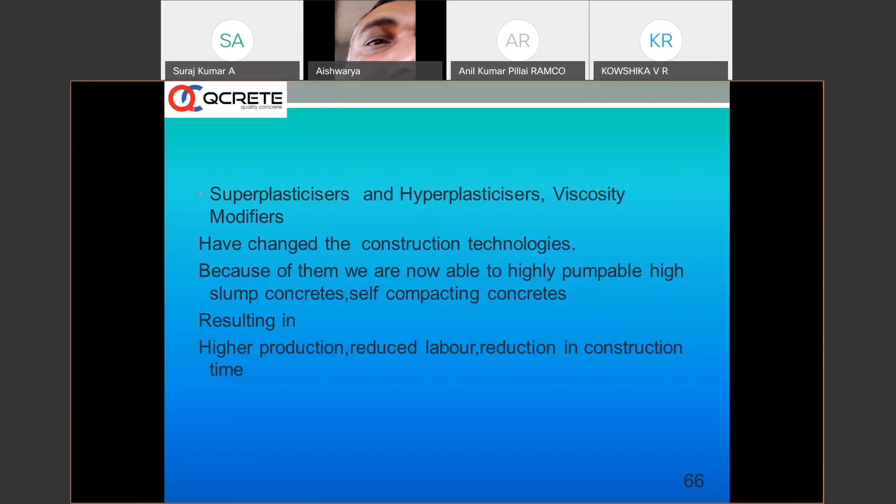We can see one of these SCC concretes. Use of a host of SCMs like metakaolin, microsilica, GGBS, fly ash, in conjunction with corrosion inhibitors, shrinkage reducing admixtures, and hydrophobic admixtures, can push concrete to the highest durability limits, which many of the ready mix companies are doing using these kinds of materials.

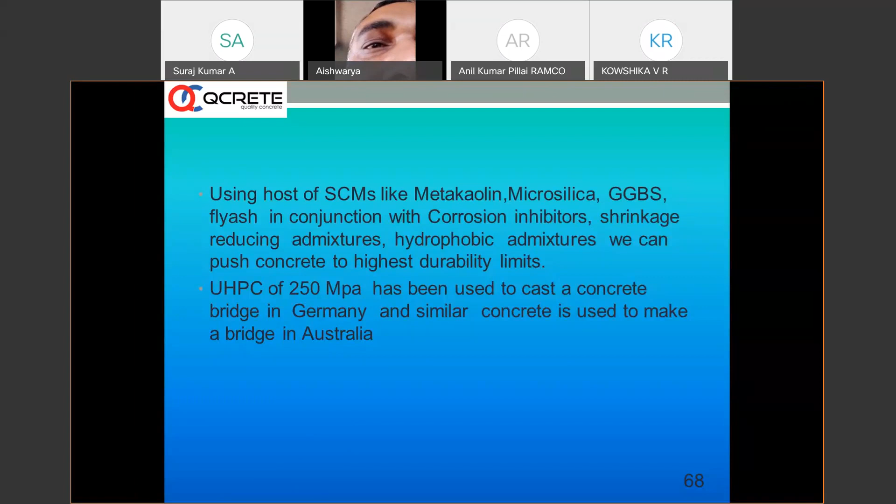UHPCs of 250 MPa have been achieved, used to cast a concrete bridge in Germany, and a similar concrete is used to make a bridge in Australia. So high performance admixtures with SCMs lead to lesser concrete, longer service life, and lesser usage of cement.

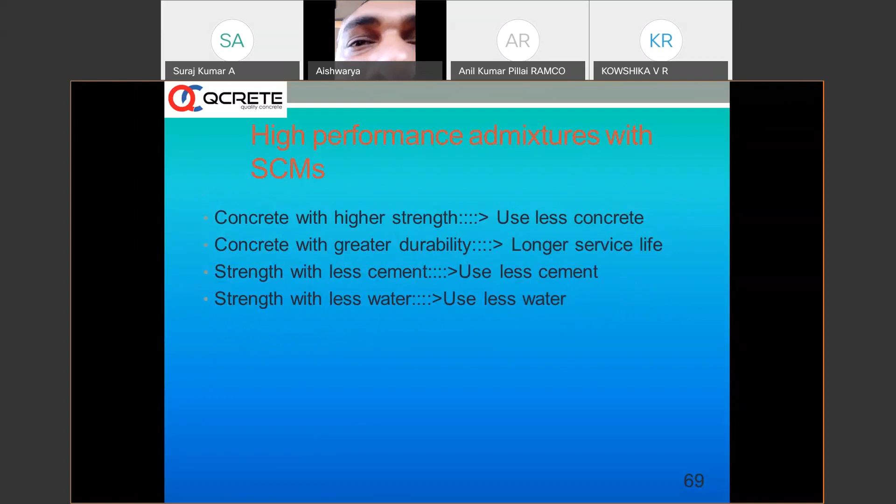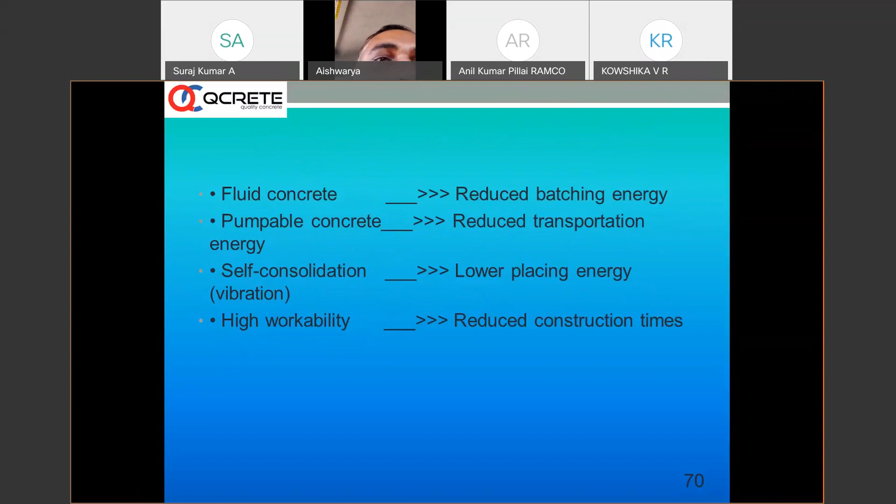Lesser usage of water, can reduce transportation energy, lower placing energy, and also reduce construction time.

So, living beings, living things. Some of the living things we see here, Pando, the oldest living plant. This colony of plants has been living for 80,000 years, protected in the US. So plants can live up to 80,000 years, and we have pyramids built 5,000 to 6,000 years back.

Modern day scientists and concrete technologists are struggling today to have buildings last 100 or 150 years. And even that can be achieved only if you are using, according to me, materials like SCMs and lower water cement ratio. Without the usage of SCMs and good concrete technology practices, even this 100, 150 years of life of buildings will become a question mark.

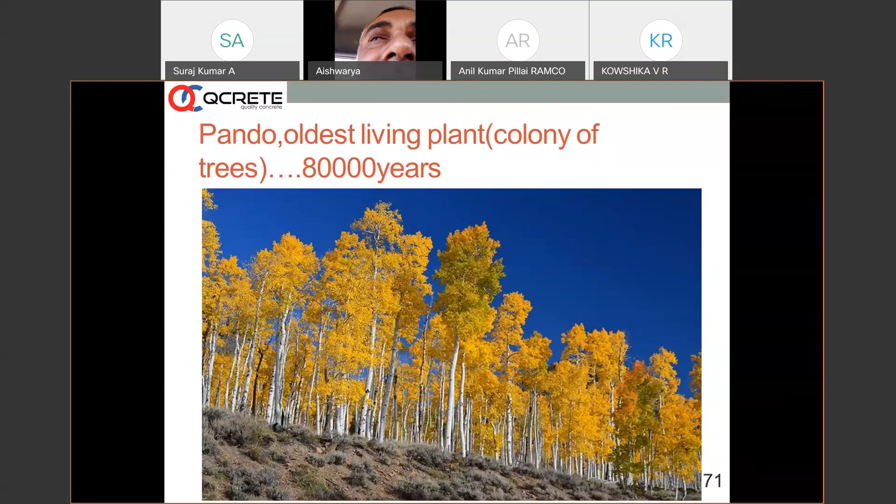Through this webinar, we encourage the use of SCMs, and there is significant contribution from the entire ready mix industry in this regard, as they are using fly ash and GGBS based on availability closer to their plants in most of their concretes, making greener concretes and contributing significantly to the environment, while also making technically feasible mixes.